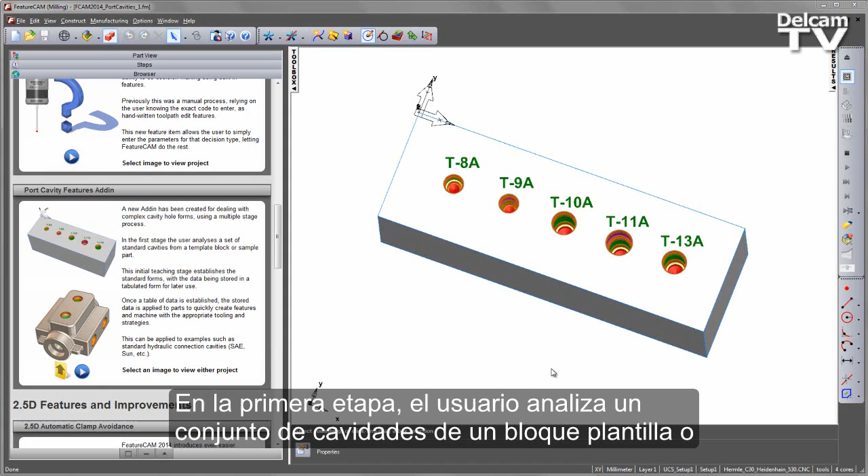In the first stage, the user analyzes a set of standard cavities from a template block or sample part. This initial teaching stage establishes the standard forms, with the data being stored in a tabulated form for later use. Once this table of data has been established, the stored data is then applied to parts to quickly create features

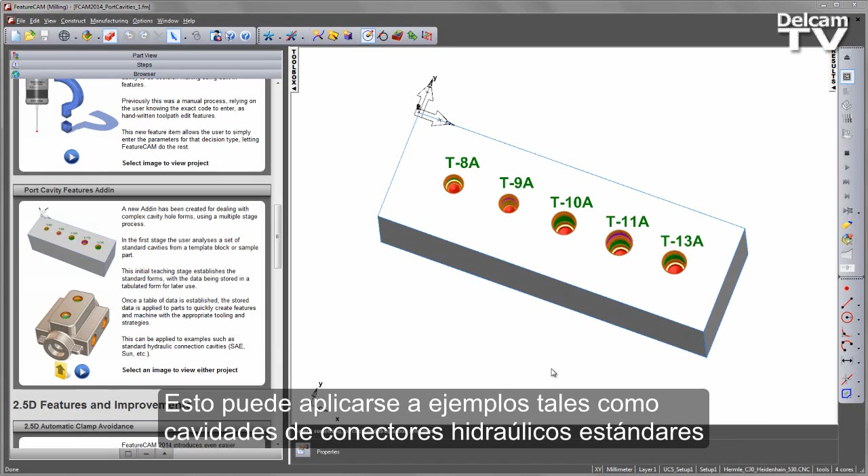and machine with the appropriate tooling and strategies. This can be applied to examples such as standard hydraulic connection cavities from SAE, Sun, and so on. In this example, you can see we've got our standard block in front of us with a number of standard cavity forms from Sun.

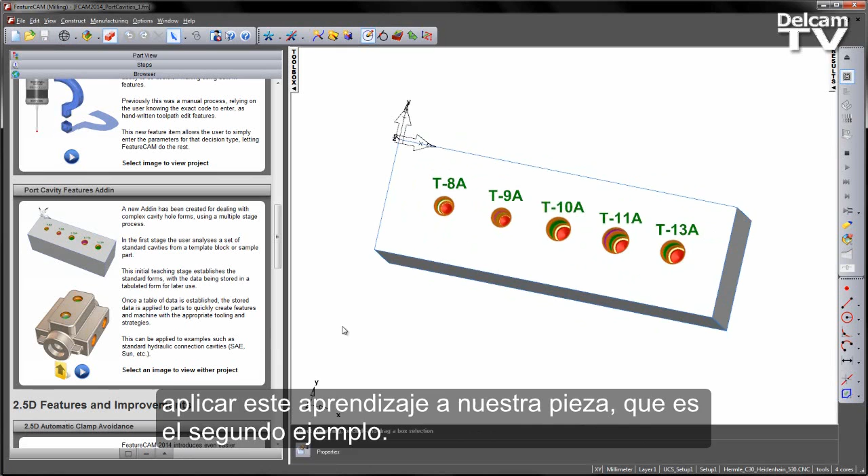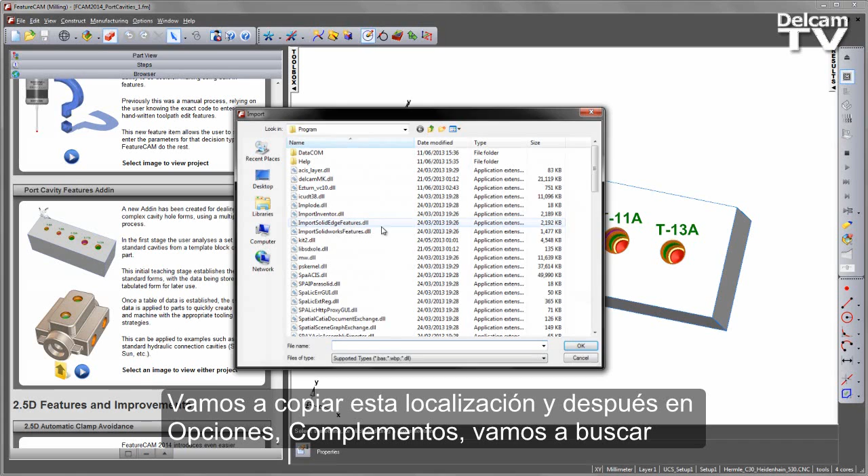We can do this from the folder in the graphics screen. In this case, you'll see we have our port cavity add-in, which is what we want to load. I'm going to copy this location, and then under my options, add-ins, I'm going to browse for that add-in. Once I've loaded that in, I can choose OK, and you'll notice I get a new toolbar with 3 icons on it.

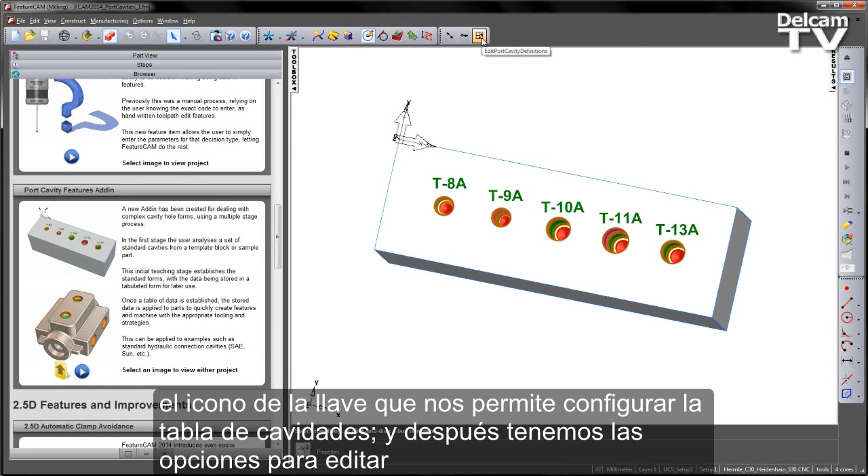The arrow icon allows us to swap between ports only mode from our query mode. We have the key icon, which allows us to configure the cavity table, and then we have the option for editing the definitions.

First thing I'm going to select is the configure button, and you'll notice in this case we have several parameters that we can control. We can choose whether we're creating the ports, whether we're investigating the part with the query only mode, or disabling the functions.

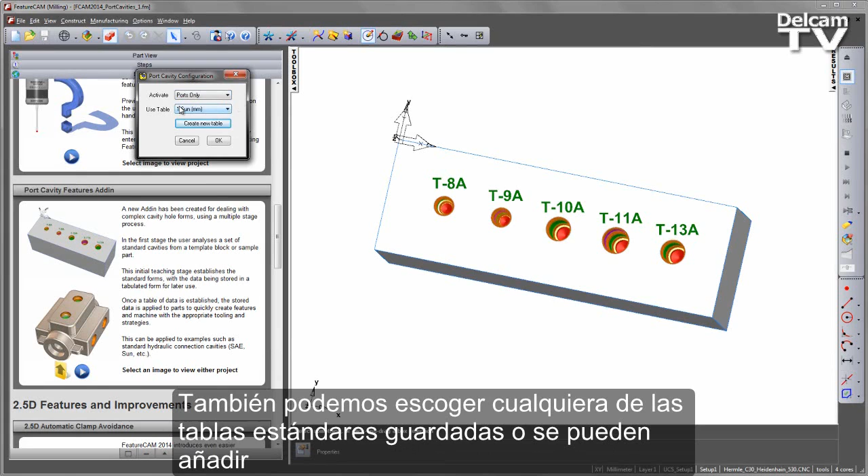We can also choose any of our standard tables that we've got saved, or you can add your own custom tables if you wish to do so. In this case, I'm going to create a new table, and I'll call this one test, and say OK.

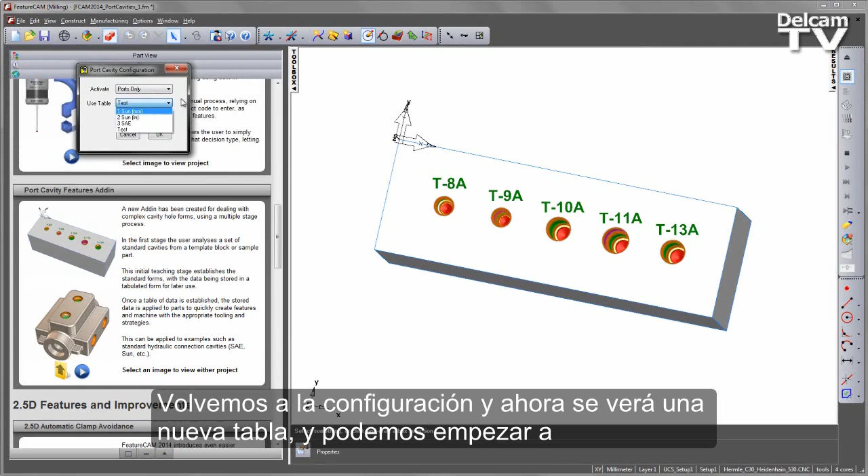If we go back to our configuration, you'll now see we have a new table that we can start populating with values. I'm going to choose the query only mode and start investigating my part.

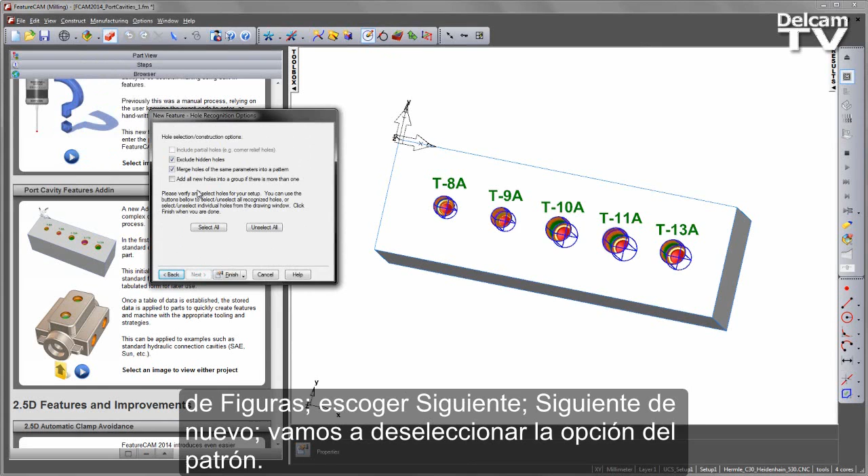To do this, we simply go into our new feature wizard, we choose hole, extract with feature recognition, choose next, next again. We're going to uncheck the pattern option, and if I rotate round, you can see we've got quite simple hole forms down the component. I'm going to select all and say finish.

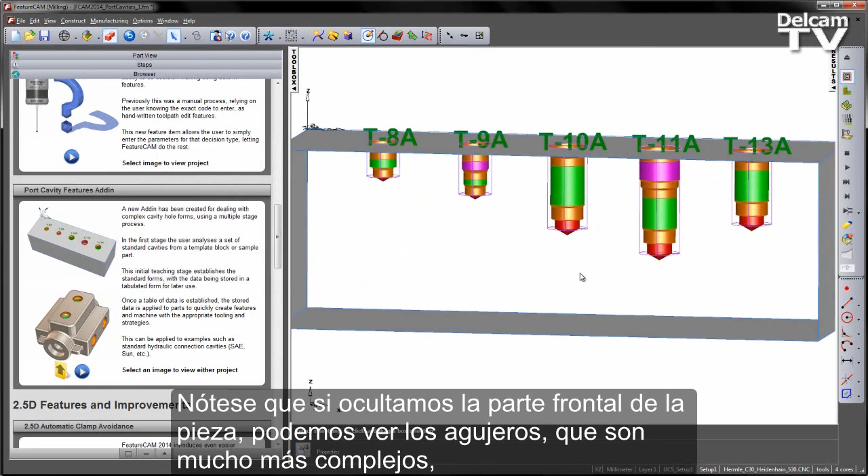Note if I hide the front of the part, you can see the holes themselves are a lot more complex, but we've got some simple forms that allow us to extract the dimension information.

If we go to the part view, we can see we've got the dimension checks have appeared in the list. Each one of these is a different size. If I double click, you'll notice that the dimensions have been split into different levels.

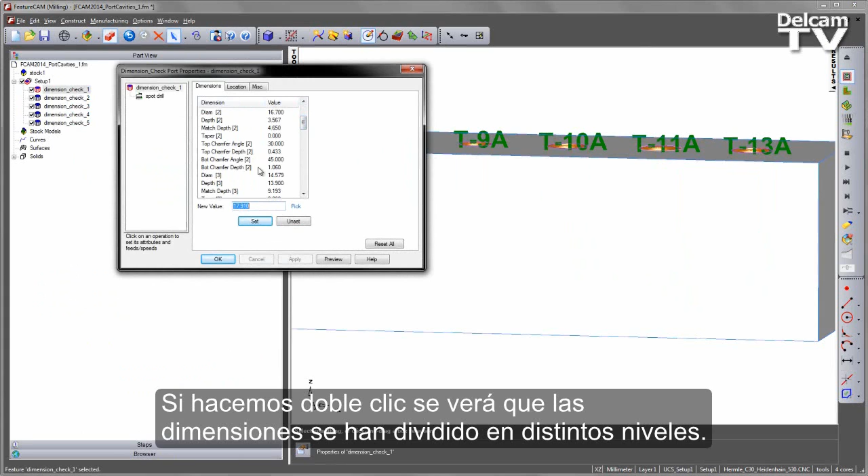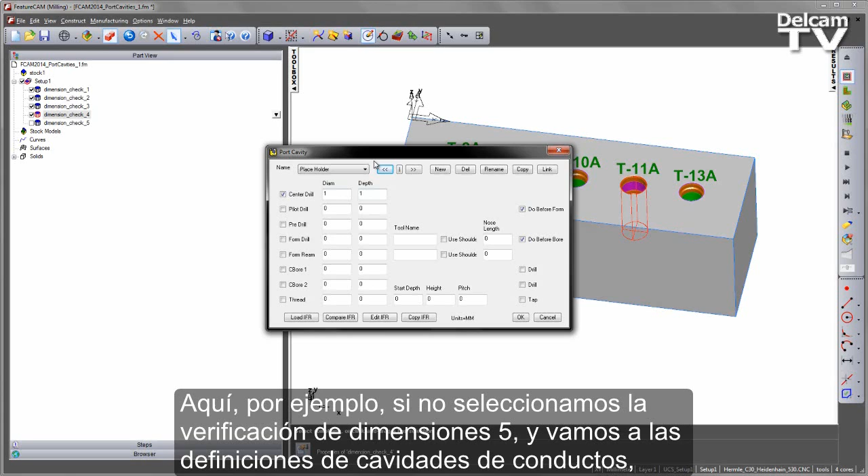All of these can be added to my process. Depending on whether I have them checked or not, you'll see those will be added into the table. Here, for example, if I uncheck the dimension check 5 and go into my port cavity definition, you'll note that

we have a placeholder which is just an empty profile, but I can choose the load IFR, and this will bring in each one of those that I have selected. In this case, you can see we've now got 4 definitions out of the 5 that I had selected here.

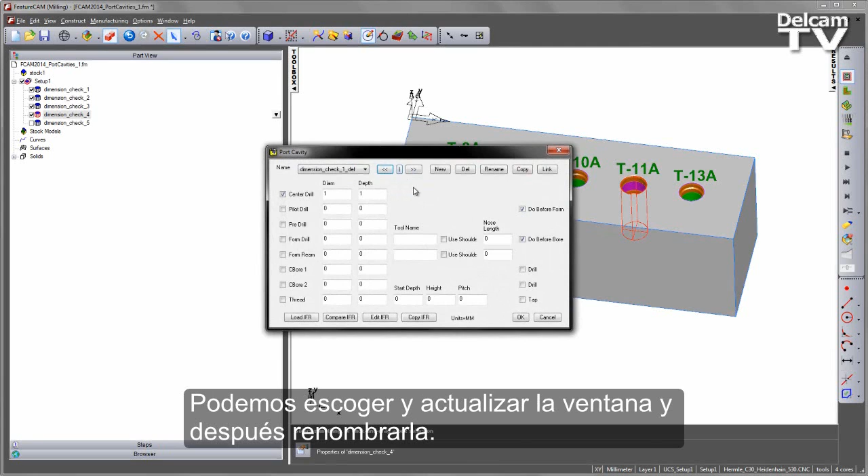Each one of these can then be edited. I can choose and refresh the window and then rename. In this case, you can see the names are already given for each one of these locations. The first one is a T-8A, and you'll see that updates in my definition list.

You can repeat this process by selecting the second one, refreshing the screen, and then renaming these. So let's call this one T-9A, and the third one, again we can rename T-10A.

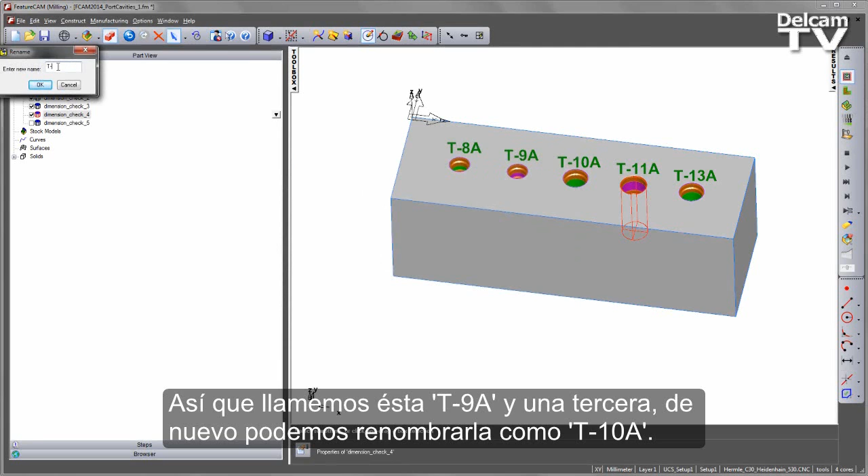If I have any dimension checks that I don't want to include, I can go ahead and delete those from the list. I'll only be left with the ones that I have decided to keep.

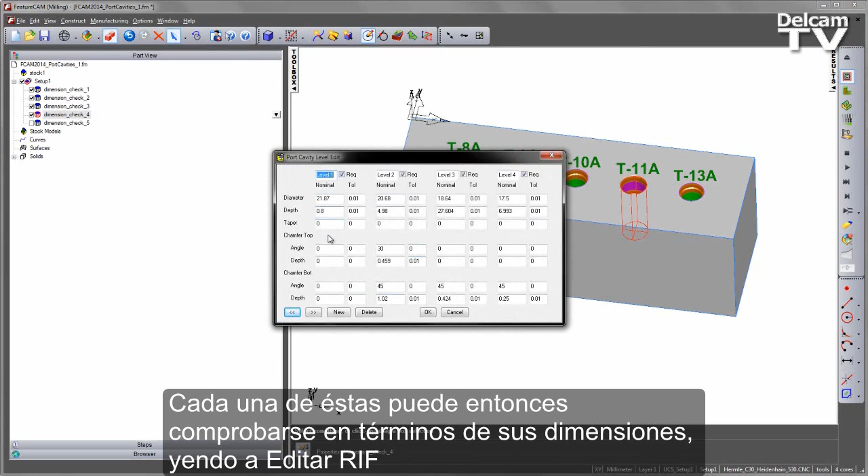Each one of these can then be checked in terms of its dimensions by going to the Edit IFR, and you'll see you get each of the different levels for each of the different sizes.

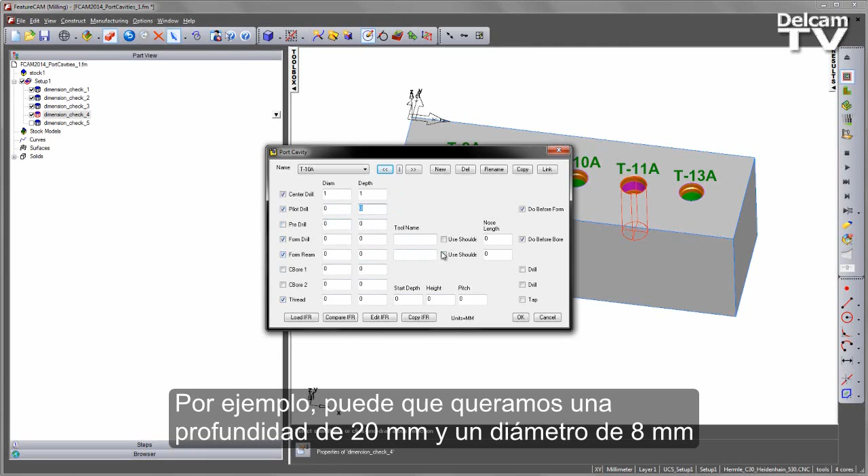As well as that, I can also go and change the process. So for example, I might want to pilot drill, form drill, ream and thread, and in each case I can enter the parameters. For example, I might want a depth of 20 millimeters and a diameter of 8 for my pilot drill.

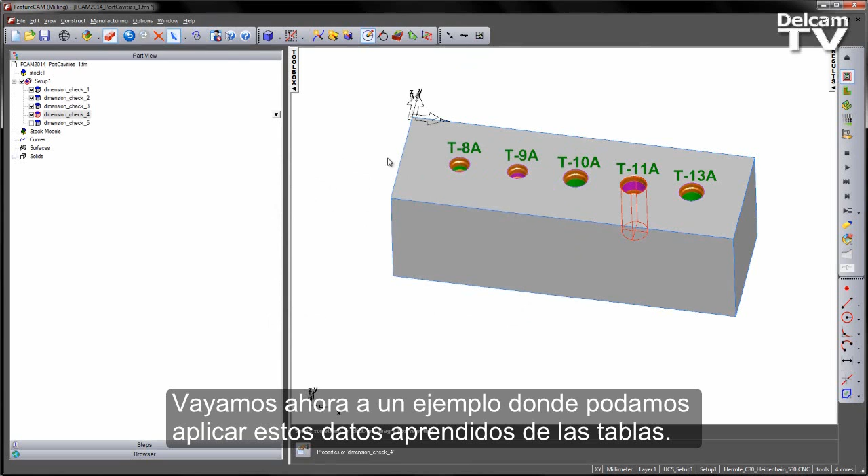Once I've chosen OK, those will be stored, and when I go back to my T10A, you'll notice that we get an update of the parameters when we make it active. So let's have a look at an example where we can apply this learned table data to.

In the second part of this demonstration, we're going to work on this hydraulic selector valve. In this case, you can notice there are a number of cavities already pre-created. What we want to do is go ahead and recognize these and machine them.

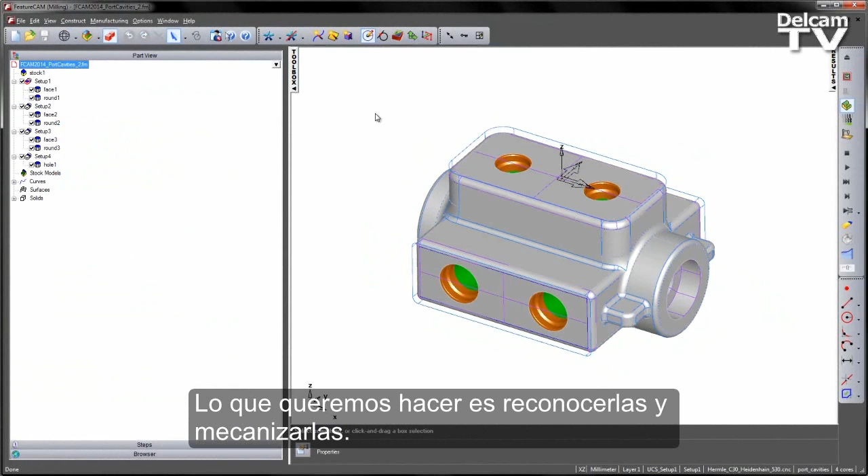If we look at the part view list, we can see we've already got a number of features that have been pre-generated, and you'll notice some machining around this casting form. That's our component so far.

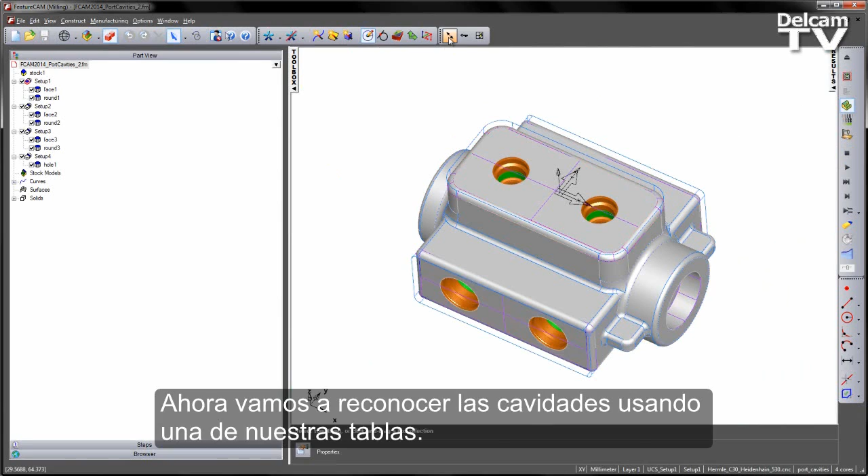Let's go ahead and recognize the cavities using one of our tables. In this case, I can go to my configure mode, and I've got the option to do ports, query or disable as before. In this case, I'm going to go to my ports only mode.

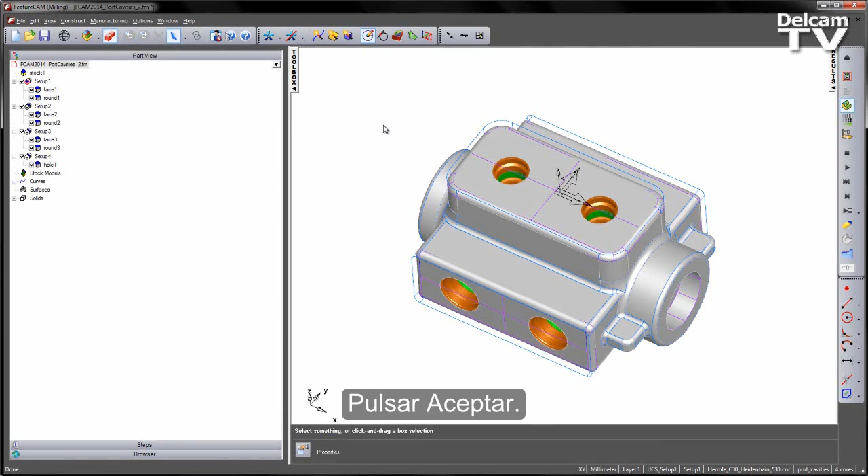I'm going to use the Sun standard table that I've got already established. Let's say OK. We're now in port mode. If I have any concern, I can always switch into port mode by selecting the arrow icon.

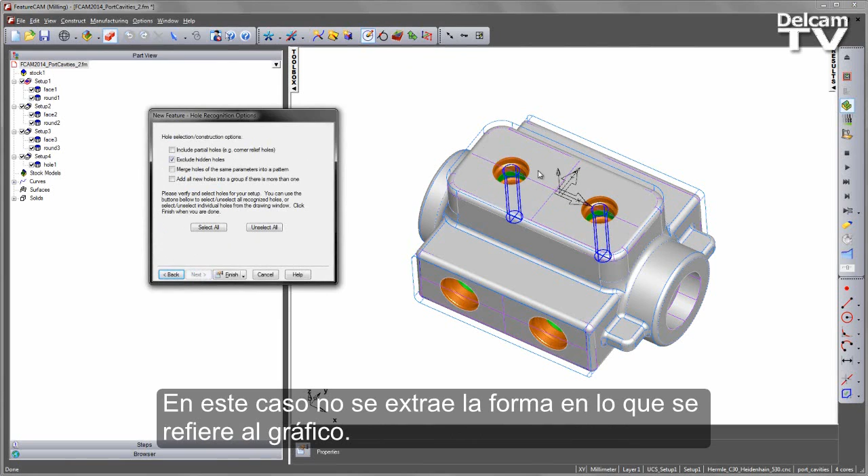I can now go in and choose my hole, extract with feature recognition, cycle all the way through, and you'll notice it identified the two holes. In this case, we don't extract the form in terms of the graphic, it just simply gives me an indication as to where that port location is.

I'm going to choose to select all and finish. Replay my 3D simulation, and you'll see I get my complex cavity form like so.